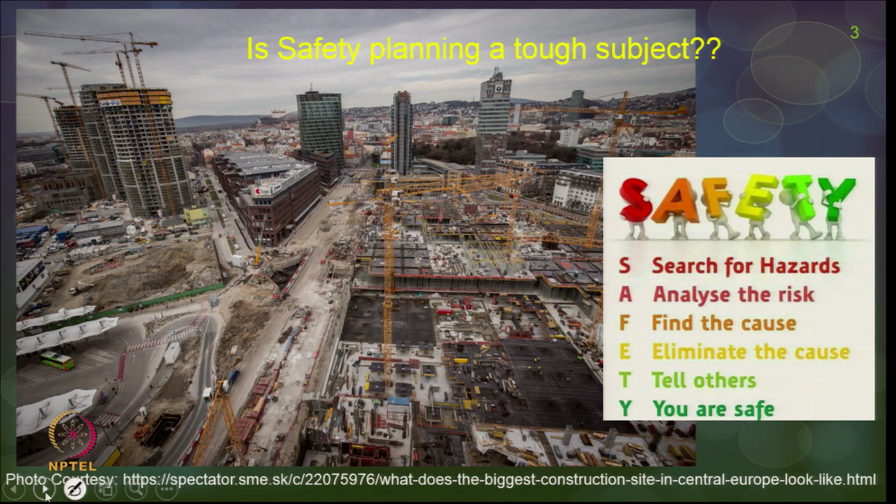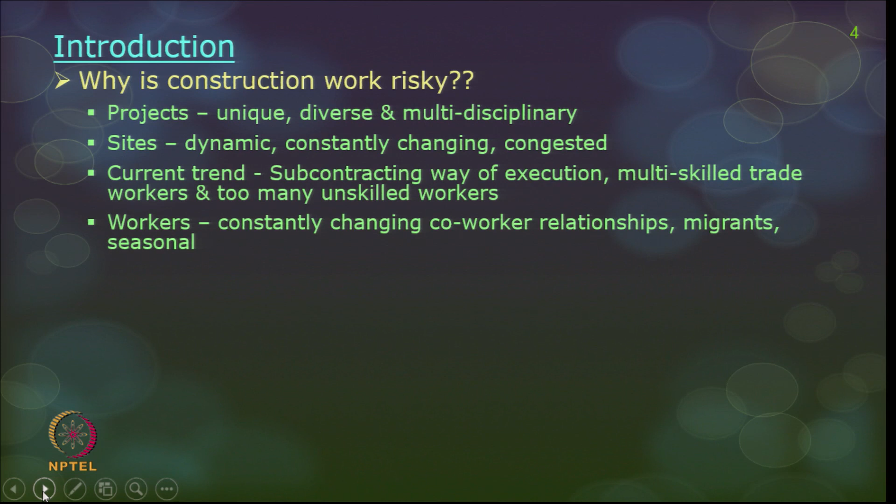Let us talk about why in construction we are not able to achieve a safe environment compared to other sectors. Safety is a major concern in every sector, like aerospace or manufacturing. But why is it so fuzzy in construction, and why is it not achieved even till date? There are so many unique factors as regards construction projects alone, and let us discuss a few of them.

Let us talk about the projects. Most of these projects are unique. For example, if you manufacture a car, the same model may be manufactured repeatedly, so you know what the hazards are, what the sequence is without complicating things too much, and what safety precaution will suit you best, and so on.

In construction, projects are unique, so the learning you get in one project you may not be able to apply in the next 4 or 5 projects. That knowledge and experience you got from one project you may apply only after 5 or 10 projects. That doesn't happen in other sectors.

Construction projects are always very diverse. You have so many engineers, starting from architects, structural engineers, MEP engineers, then consultants, vendors, suppliers. So many people come in and play their role. It is actually meeting different minds, getting work progress done, and at the same time having a safe environment in place, which is quite challenging. As a result, projects are most often multidisciplinary.

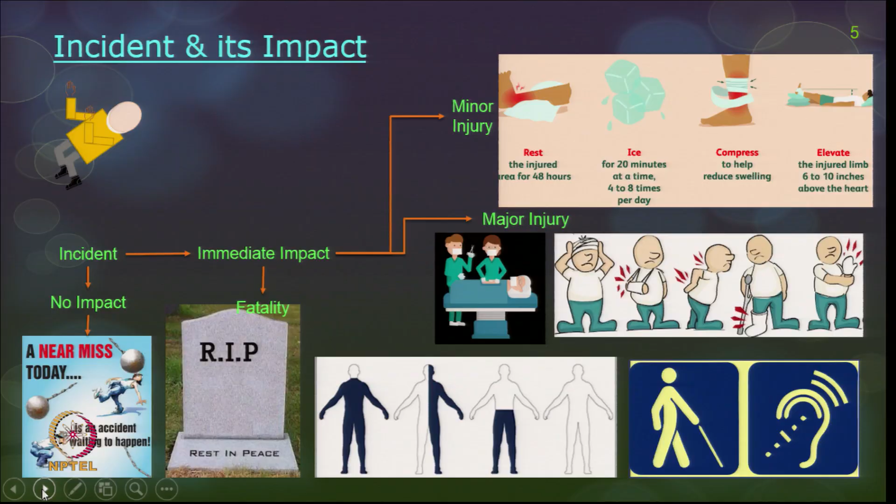The other one is a slow impact. There can be hazards which create a slow impact onto the workers. For example, if you work continuously in concrete or handle cement without wearing proper gloves, after some point of time you may see a lot of cement dermatitis, primarily called cement dermatitis. These will not happen in 1 or 2 days, it happens maybe for several years down the line, 3 to 5 years, or some impact can even happen 10 years later. These are all called health issues.

Now if you look at incident impacts, this is not triggered with just one incident, but I am categorizing everything together. So incident has either no impact, which is called a near miss, or immediate impact, which is a minor injury, major injury, or a fatality. And a slow hazard impact we call health issues.

If you look at the history of safety, which we will discuss a little later, so far people were worried about only the visible impacts, whatever we call minor injury, major injury, and fatality. That was what was really seen by the construction group, and they were treating a lot of safety programs and policies most often focused only on safety issues in construction.

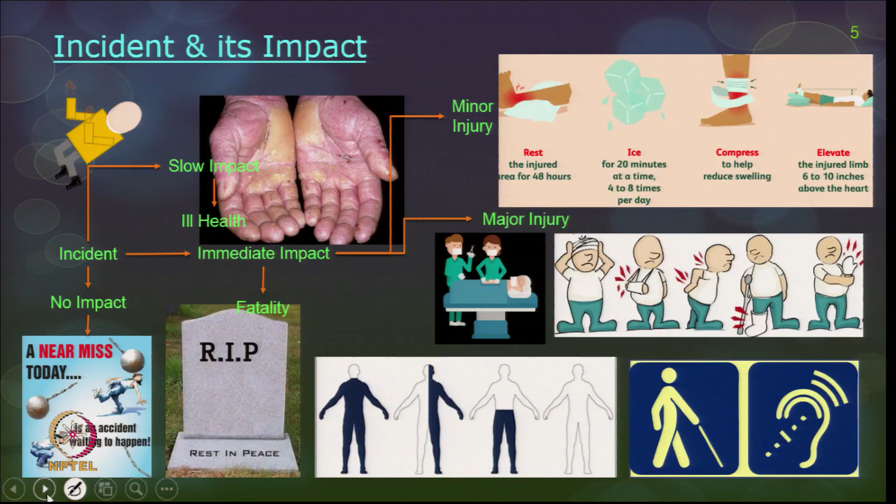Now let us talk about the definitions. What is safety? Safety is always defined as an absence of danger or a state of protection. Then a few of the terminologies which we have seen in the previous slide.

Number one is incident. Any incident is an unplanned, unwanted, unexpected, unfortunate event which disrupts the work process and may cause an injury or damage. Based on the impact, one is near miss - incidents where no property was damaged, no personal injury sustained, but given a slight shift in time or position, damage or injury easily could have occurred and did not happen this round because of the luck factor.

Now there are some things which have come in the definition. If you look at safety, most of the focus on safety is only on personal injury, in the sense only on the worker's injury. But safety as such has to take care of equipment, materials in the site, equipment available in the site, and also the personnel, which implies workers on the site and other human beings on the site. But colloquially most safety norms and policies are primarily towards workers' well-being in the site only.

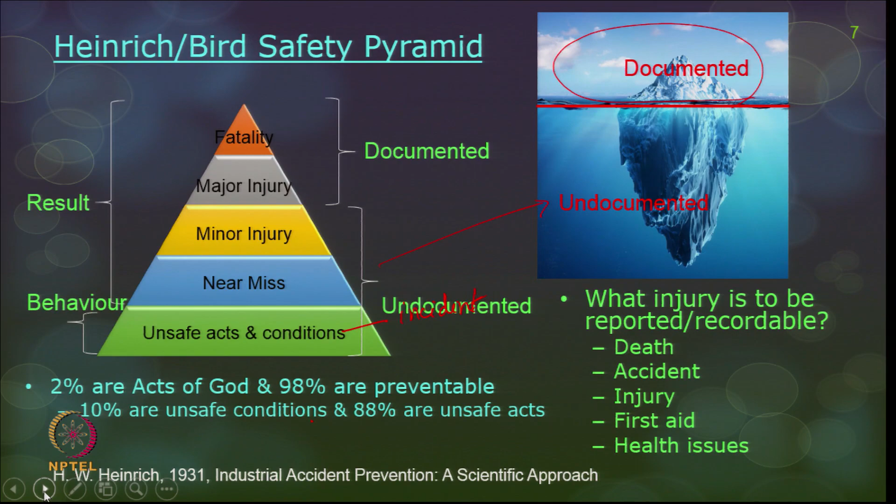Now, what injuries have to be reported or recorded, so it acts as a lesson for future projects, so that from one mistake you have a learning? Any death obviously has to be reported: the reason for death, why it happened, where it happened, what really happened, what the worker didn't do, what precautions the management didn't take. All this has to be reported.

Any accident in the site implying major injury has to be reported for sure. Minor injury, yes, if possible, and if you have a system in place to record all your minor injuries, it also has to be reported. First aid cases, yes, including near misses, also has to be reported if you want complete, zero-accident tracking in a construction site.

Near misses and first aid cases, even though too many happen every day, there should still be a policy of reporting and documenting everything, which should be used as a learning lesson for all workers. Last but not least, health issues also have to be reported these days.

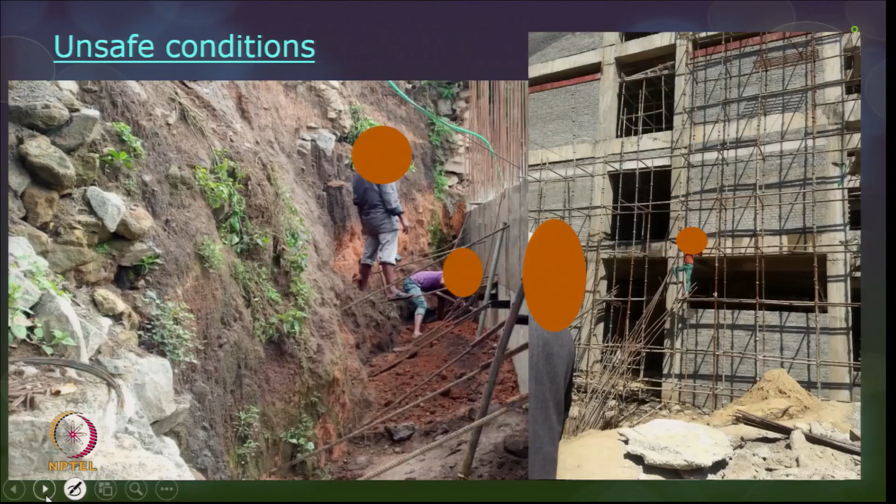Here also, you cannot avoid working on these scaffolds and climbing up to do construction progress work. So this is primarily an unsafe condition, but there could have been a provision for safeguarding the environment. Still, there could have been provision for safeguarding the environment.

So what are unsafe acts and unsafe conditions? An unsafe act is an activity not done according to safety standards. Examples include failure to wear PPE, the number one unsafe act in construction sites; ignoring tool defects, maybe equipment didn't work and you don't report it to management but still try to operate and complete your work; or you don't know how to operate equipment and try to mess with its functioning. All these are examples of unsafe acts.

Violation of health and safety rules: if you have to wear all your PPEs like shoes, hard hats, gloves, you have to work accordingly. Even if you are not comfortable, you should not remove the PPEs and start working in a construction site. The next is unsafe conditions.

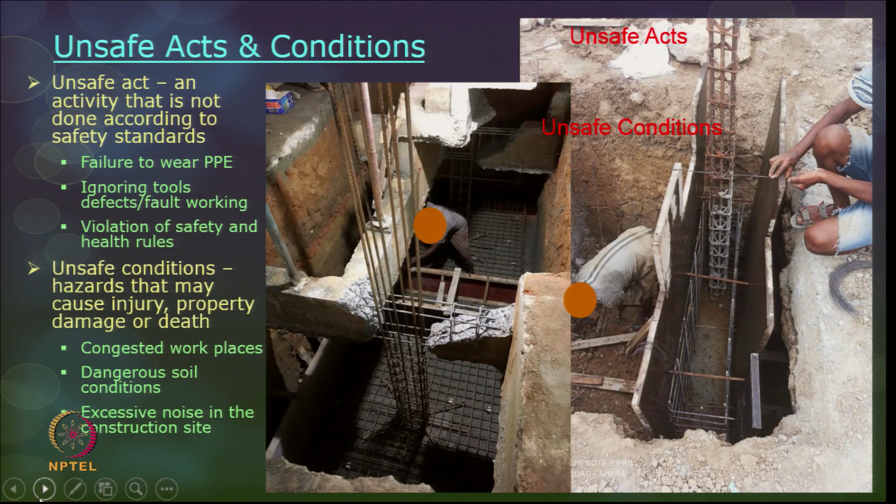Excessive noise in the construction site is also an unsafe condition. You are working in a very big construction site, not operating any equipment yourself, but all around you there are so many equipments producing lots of noise above permissible decibel levels. When you are in the midst of so many equipments, your mind will not be at peace and concentrating on safety. So this is an example of unsafe conditions.

The next term which came along in the introduction was hazard. Many of these terms are used colloquially, but now you learn the different terms and try to put the proper terms when talking about safety. Hazard means an inherent property or ability of something to cause harm. As such, hazard is not dangerous, because there are three types of hazard.

We will discuss this when talking about hazard analysis as a safety program. Every hazard is not active and it will not create any harm. For example, there is an electrical wire passing along a line with equipment also connected to it which was operating, so this is primarily an active hazard.

If by mistake you slip or trip onto the electric wire and fall off, it can create lots of hazards. Let us also complicate the issue, maybe it's lying along a floor wherein curing is happening, so curing actually has water beneath, and then it's a very serious and active hazard. So hazard as such has to be identified in any project, that is the number one issue if you want a completely safe construction site.

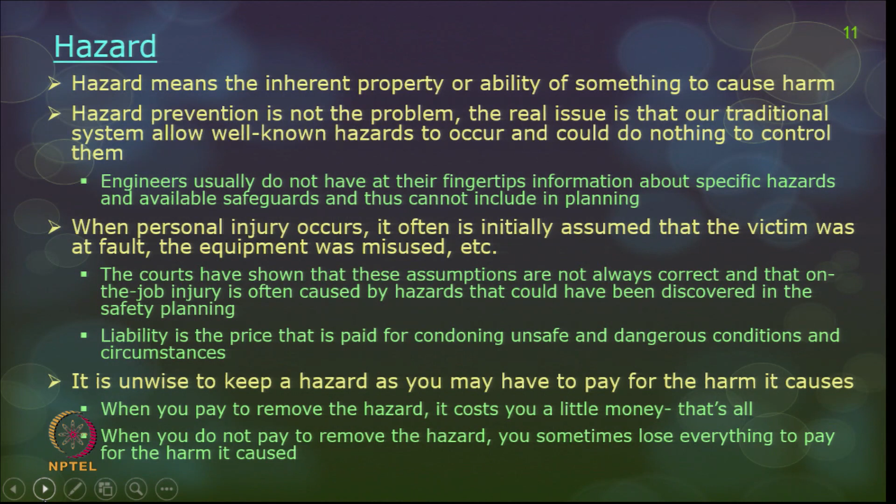That generally does not happen, because once the courtroom proceedings are over, it actually goes into the files and is not open to the public to be kept as lessons learned for other projects. So it is unwise to keep a hazard, as you may have to pay for the harm it causes. When you remove it you have to spend a little money, but if you do not try to remove it thinking you may have to spend money, you may have to pay even more than anticipated. Sometimes you may have to lose everything to pay for the harm it caused. That is the real message behind hazard.

Some researchers have also identified the top hazards in a typical building project, and a few of them are fire, unsafe scaffolds, working platforms, open shafts and edges, unsafe electrical equipment, unsafe excavations, unsafe cantilever loading platforms, struck by foreign body, falling objects, unstable or unsafe structural membranes, overloaded vehicles and forklifts, unstable mobile cranes, unsafe lifting operations, unsafe working at height, unguarded machinery, and unsafe access or egress.

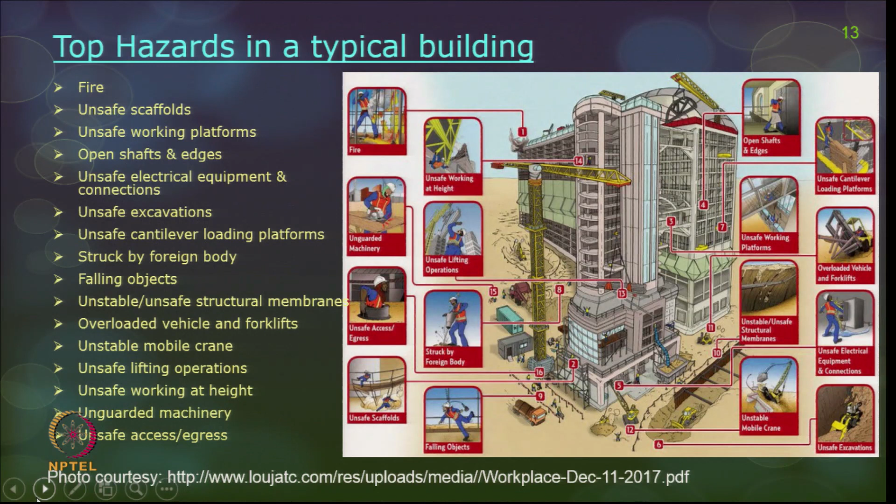So there are a lot of hazards still available in construction sites, and if you closely watch a project and note down all of these, then you can actually think of a lot of corrective measures and preventive measures for accidents.

Now let us move on into the terminology. So far we have discussed a lot of terminology like fatality, major injury, minor injury, incident, near misses, unsafe acts, unsafe conditions, hazard. Now we will again move back to what is this fatality, major injury and minor injury, and how it is in the present scenario in the construction site.

As I told, this pyramid has a lot of numbers associated with it. Heinrich has proposed that for any one major injury there might be almost 29 minor injuries and 300 near misses. In a way it is 1:29:300. A lot of researchers have given different numbers, and these numbers have come from different times and from different groups of construction projects. If you want to know this, the number is quite necessary because you have to think of safety precautions, how many safety programs and investment on safety you do based on some assessment of these numbers in your project. So you may need an understanding of the number.

Accordingly, other ratios are 1:100:10,000, 1:10:600, and there are so many numbers available like this.

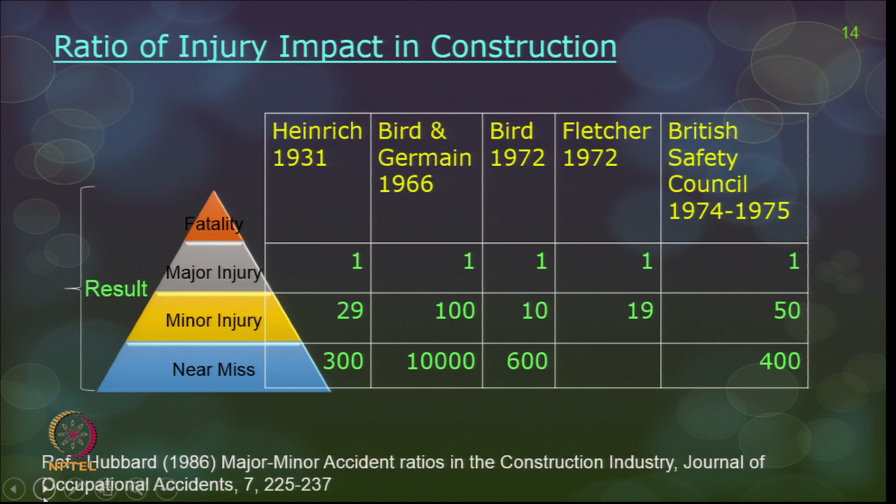Understand that a pyramid always has so many near misses compared to major injury, and so many minor injuries compared to major injuries, and the same way to fatality. So that pyramid is still existing.

Now let us talk about fatality. We will go again from the severe impact to the least impact, so number 1 is fatality. If you look at projects which happened 50-60 years back, in the 1940s, 1930s or 1869 and so on, there are very famous projects which are existing even today, and they are treated as wonders of the world. But if you talk about safety and the number of fatalities that happened, so many projects are really considered the deadliest construction projects. Let us discuss a few of them.

The Great Wall of China had almost 10 lakh deaths during construction - this is only the reported case. So the Great Wall of China had many deaths during construction, and the Burma Siam railway is actually treated as a death railway because so many workers died during its construction - almost 1 lakh people died. The Suez Canal again had 1,20,000 deaths.

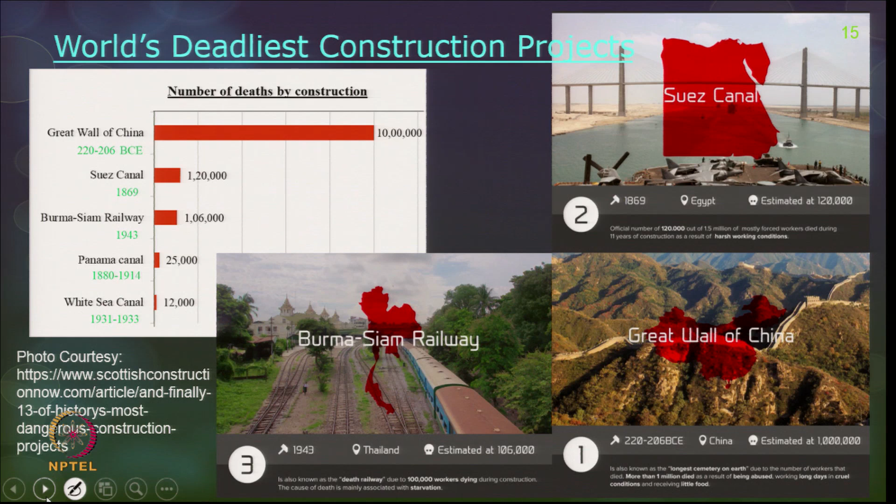So in these earlier projects, so many deaths happened, and from then onward safety became a serious concern. Now if you see, a lot of these fatalities have been really cut down, and today, where are the fatalities in a construction project?

If you look at comparing with other industries - building construction, which is primarily a standard industrial classification, is 25%, heavy construction other than building construction has 19%, and special trades is 56%. This is the statistics given here. So building construction and heavy construction are still having a high number as far as fatality is concerned.

And if you look at comparing with other sectors, for example transport or warehousing, agriculture, manufacturing and mining, construction is still ranking number 3. Construction is even more hazardous than mining and manufacturing - you should note that down. This is a record as of 2018 on fatality, so we still have to improve on fatality rates in construction.

Now if you look at the trend over the last 10 years, there was a steady decline in fatality, and again the rate of fatality has increased. This is primarily a report which has been seen. So 2016 onwards, construction fatalities were 991, in 2017 it was 971, in 2018 it is 1008 and so on. So it's still a 3 digit or 4 digit number oscillating between here and there.

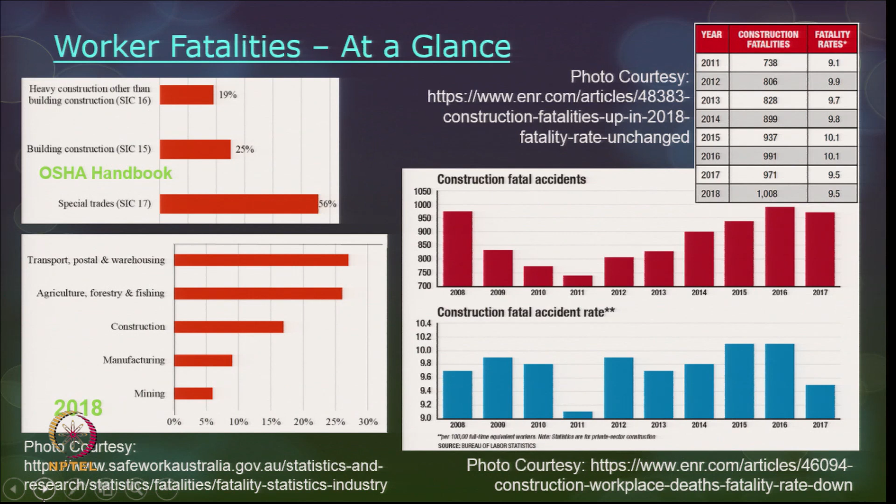There can be many reasons - maybe there were fatalities which were not reported and the reasons were not identified, so they weren't reported. There can be real reasons behind the fluctuations in the death rate, but you should still understand that fatalities are still happening in construction sites, which has to be cut down.

Now, there is one infographic which says according to data from the Bureau of Labor Statistics, for 10.3 million workers employed in the construction industry, 991 construction workers were killed on the job. That's the statistics we saw in the previous slide for 2016. For these 991 fatalities, almost 82,760 non-fatal injuries and illnesses happened - this is actually a combination of major injury and minor injury put together.

What people generally say is that more than fatality, major injuries are a real pain and major problem to construction workers. With fatality, the worker is no more, only his family suffers as a result of the loss of the worker. But when you talk about major injury, a person has to survive the remaining part of his life either without his eyes, legs, or hands, and has to be dependent on someone for the rest of his life in order to go through it. That's why major injury is treated as more serious compared to even fatality.

Instead of death, a construction accident can often cause very serious injuries, and deaths resulting from construction accidents are far better than traumatic injuries or illnesses. What about coma or major brain injury where the person is on bed rest and so on? These are all real serious pain and suffering compared to even fatality. So immediate death has some advantages compared to all these major injuries.

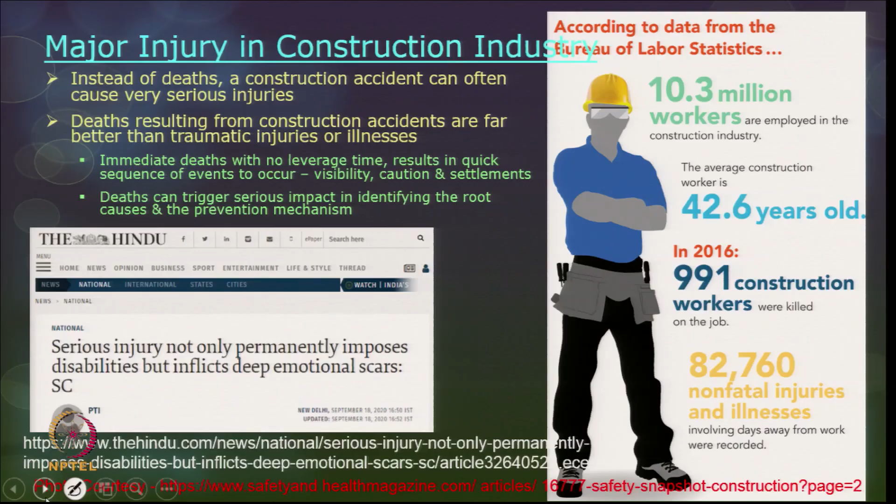And what about the trauma of the accident? The trauma for the worker is something he has to carry with him; it is a very serious pain for the construction worker. This is also a recent article from The Hindu, published in September 2020. Serious injury not only permanently imposes disabilities, maybe loss of an organ, but it also inflicts deep emotional scars. The way the accident happened stays like a trauma in the minds of the workers till he dies. So that is a very serious concern, and you should try to remove accidents in construction sites.

Now, let us talk about how these accidents are classified. So far we know only about major injury, minor injury and fatality, and in many construction sites they talk about death and injury only - two classifications. But all accidents which are not resulting in death are not treated the same; there are a lot of varying levels of impact.

Now, let us talk about the non-fatal injuries and their varying levels of impact. Accordingly, there are two terms which come in: one is absence, the other is incapacity or disability. Absence can be short absence or long absence; incapacity can be partial incapacity or full incapacity. Short absence is less than 5 days away from work and then you come back to work. Long absence is more than 5 days of work - you are actually on leave and then you return back to work with full duties, resuming your full duties.

Partial incapacity - you take leave, maybe short term or long term, but then you may come back to work on reduced duties. In the sense, you may be starting slow into the work and getting fully embedded into the work culture. Full incapacity - maybe you have to switch over your job. For example, you were doing welding earlier, you got an eye injury, you lost your eyes, then you may not be able to do welding after this incident has happened. After you recover and come back, maybe you will not even have any work to do, because you are fully not suitable for any job in the construction site.

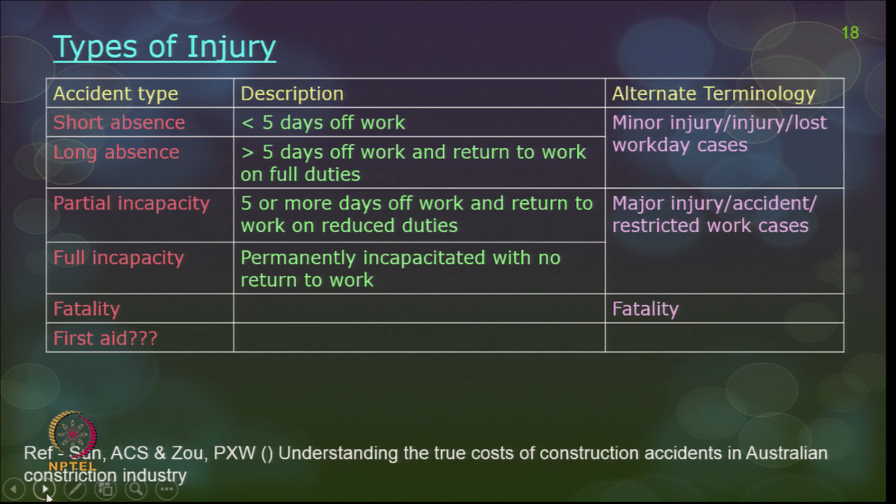Now, let us talk about this disability classification. A lot of researchers have talked about so many terminologies - short absence, long absence, total incapacity or partial incapacity. Now we will be discussing permanent disability and total or partial. So, that is what we are going to talk about: total, partial, permanent and temporary.

Again in reverse order - total permanent disability, wherein the worker after the incident has happened. Now there are two scenarios: one is pre-incident, where the worker was fine and fit; post incident, what is his status? In total permanent disability, he will be totally disabled and permanently disabled. There is no surgery or alternate solution to make him fit enough to do any job in the construction site. So the condition in which an individual cannot work due to injuries - examples can be total paralysis, brain injury, mental incapacity, or amputation of both hands and legs, both hands, or both legs, or both together. Then he is not fit enough to do any job later on - he is jobless after the incident has happened.

The next one is partial permanent disability - partially he is disabled and permanently he is disabled. For example, loss of one eye - with the other eye he can still manage and do some job. So partially he is disabled, and he can do some little risky job in the construction site. He may be employable, but the loss of vision on one side is permanent - a disability that impacts one's day-to-day functioning in the workplace. These injured workers generally go back to work once their treatment is over and they are fully recovered, but they cannot work with full capacity as they were doing before the accident happened. Examples can be hearing loss, blindness, or post-traumatic stress disorder, and so on.

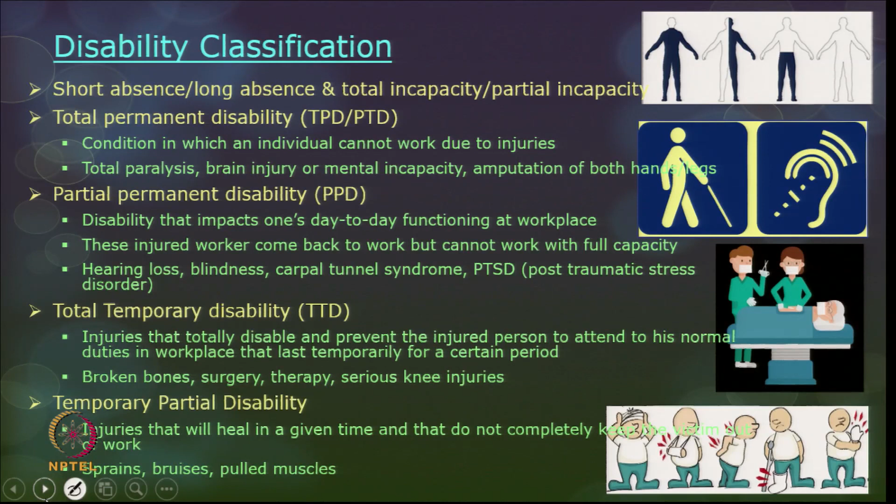But all these are absence, okay. Some sort of productivity loss you show in the construction site. So any safety accident that happens in the construction site, the immediate impact you see is absence, maybe a short absence or a long absence, and immediately productivity loss happens in the construction site, that you have to keep in mind. Now we will talk about minor injury.

In the previous slide we talked about full capacity, disability and so on. Now, what are these minor injuries? Examples are all given here. Laceration, for example, a worker has fallen down from the nth floor onto the ground floor, maybe onto reinforcement and so on, and the reinforcement rod has pierced him in several places. So it is not a regular cut with sutures, but irregular cuts and sutures. It is primarily called laceration.

Punctures - in the previous slide on hazards I showed you that a nail on lumber can be a real example for a puncture or a cut. Fracture, I think it is a very common term. Strains, crushes, sprains, dislocations because of wrong lifting or too heavy loads and so on. Scratches or abrasions which happen when you are handling reinforcement steel or something that doesn't have a smooth surface. If you handle it with a bare hand, you may get a lot of scratches and abrasions. Contusions, bruises, or internal bleeding which happen as a result of some accident in the construction site.

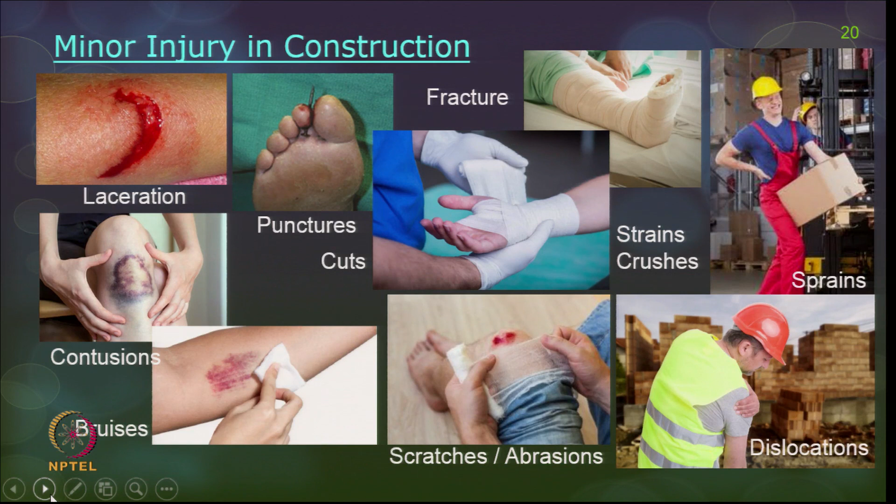So these are all classified as minor injury in construction. If you look at the infographics on minor injury, construction accounts for 31% of fatal injuries, and among all these fatal injuries at least 31,000 cases are related to these ill health issues and so on. If you look at non-fatal injuries, it can be injury or illness.

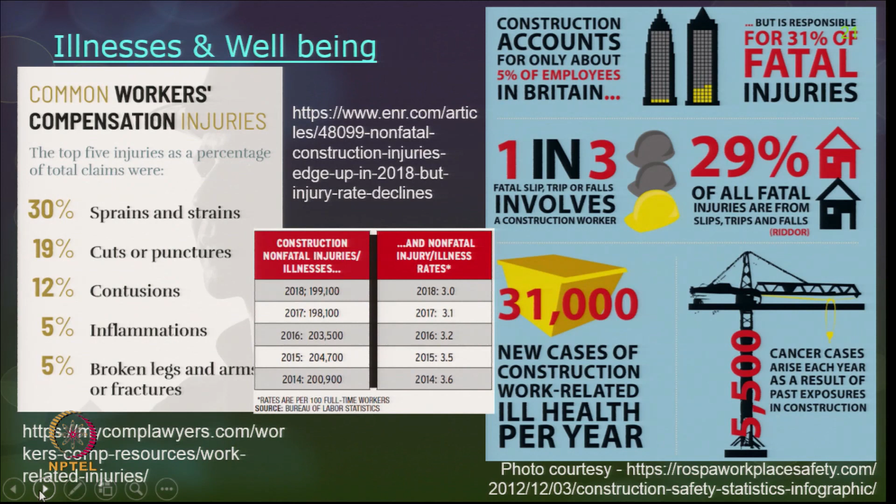If you see here the trend from 2014 to 2018, it is primarily in terms of lakhs. About 2 lakh something in 2014, and right now in 2018 it is 1 lakh 99 thousand something. This many injuries and illnesses have been reported. If you look at compensation for workers in terms of minor injury, 30% have been spent on sprains and strains, 19% on cuts or punctures, 12% on contusions, 5% on inflammations, and 5% on fractures. So that is where most of the compensation was paid to workers for minor injury.

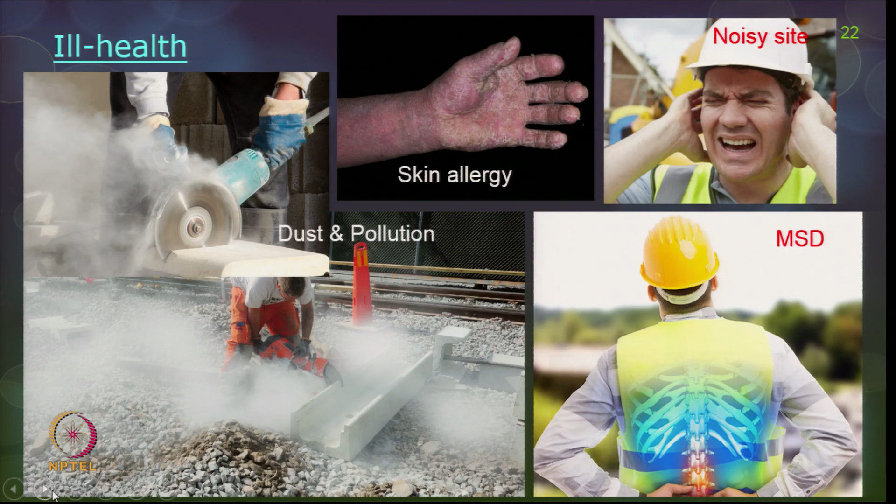Now let us talk about ill health. Ill health examples - the main example is dust and pollution. In any construction site you cannot avoid the dust, and the pollution as a result of the dust. The other one is allergic reactions, primarily because of cement. Every construction these days is dependent on concrete, so skin allergy or dermatitis is the number one health hazard you may see.

The other one is noisy sites, because of a lot of equipment, heavy equipment handled in the construction site. Noise levels cannot be compromised in a construction site.

Over some point of time, hearing impact or hearing loss can generally happen if you do not take proper precautions. The other one is musculoskeletal disorders as a result of wrong lifting of loads. Maybe you have to call a co-worker and get his help in lifting loads if the loads are too heavy. Instead of that, if you start doing wrong liftings, then you may have all these musculoskeletal disorders.

So what are these adverse health effects? These adverse health effects are so many. We will talk about health issues in detail after a few classes. So any change in body function or the structure of cells that can lead to disease or a health problem.

This can include a disease or change in the way the body functions, grows or develops, effects on children, grandchildren and so on. Some problems can be transferred, it's all heredity. Decrease in lifespan, change in mental condition as a result of too much stress or traumatic experiences, and effects on the ability to accommodate additional stress. These are all examples or issues with regard to health issues.

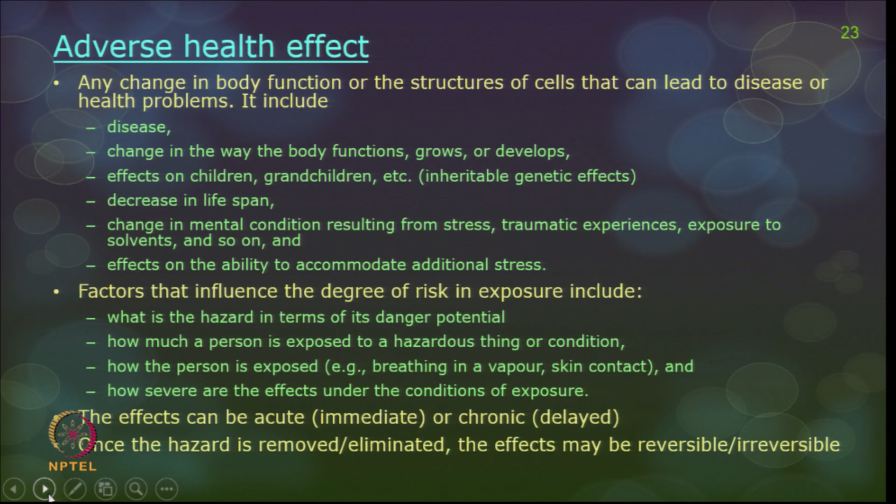Now the other issue to keep in mind is, once the hazard is removed, eliminated, or safeguarded, the effects can sometimes be reversible, and some effects are not reversible. For example, if you start taking treatments and avoid cement exposure or dust exposure, slowly you can be completely recovered. But with solvents or explosives or something that has been on the workers, some of the effects are not reversible - they are irreversible.

Now, what about the growth of the construction industry? So far we have talked about all the terminologies with regard to accidents, starting from fatality, major injury, minor injury, and near misses, and also ill health.

Now, every time this issue comes in - construction projects today are not like how they were earlier. So what was the growth of the construction industry? Let us not talk from too far in the past, let us talk maybe from 40-50 years down the line. From 1960 to present, what has happened? From low rise building structures to a lot of skyscrapers and infrastructure projects these days, like metro or even airports and so on.

If you see the trend, several of these famous, iconic, challenging or mind-blowing structures in the world, if you recall, were built only after the 1980s, with few exceptions that were built before 1980s. Otherwise, most of these structures were all built only in the recent past.

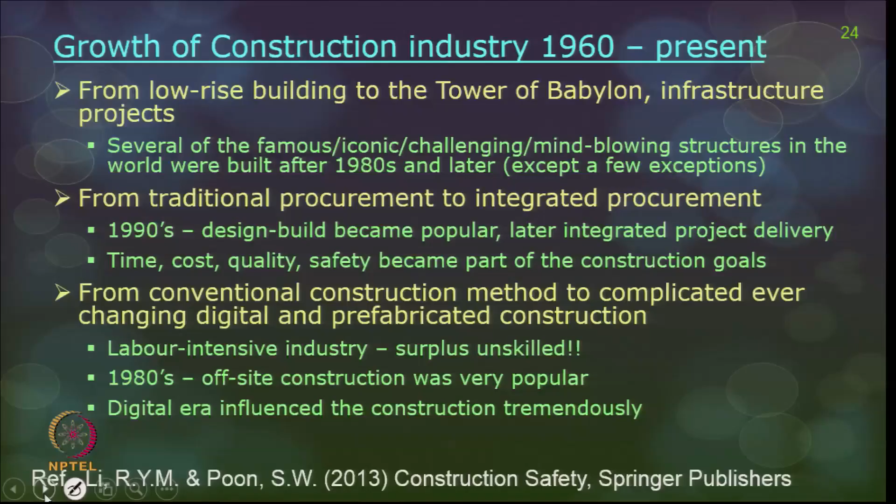The digital era also influenced construction tremendously these days - BIM and other technologies came in. As a result, we are able to move into robotics, 3D printing, and use drones for safety precautions. Lot of laser scanning and other technologies have all been there to help construction growth. So projects are always having a lot of change in trend these days.

Now let us start looking at what are the causes of construction accidents as a result of the growth in the construction industry in the last 50-60 years. Number one, we categorize it as human issues - human error, misjudgments, unsafe acts, and relationship with colleagues. Because of subcontracting relationships, you may have a poor relationship with colleagues, which may be a real reason for accidents.

If you have friends available who move as a gang from one crew to another, obviously your friends will tell you of the potential dangers in the construction workplace. For immigrants, there may be a poster in the local language, maybe Hindi, and the immigrant person may not be able to read that language and understand what is written there. So diverse culture and language is also a cause for accidents.

Insufficient safety training and education - most of these issues are common sense. You should always know you should have proper PPE when working on a construction site. Most of it is common sense, but that does not mean common sense is equivalent to safety education. There should be proper training and education on safety, and workers should be reinforced on safety every now and then, maybe in toolbox meetings or safety training.

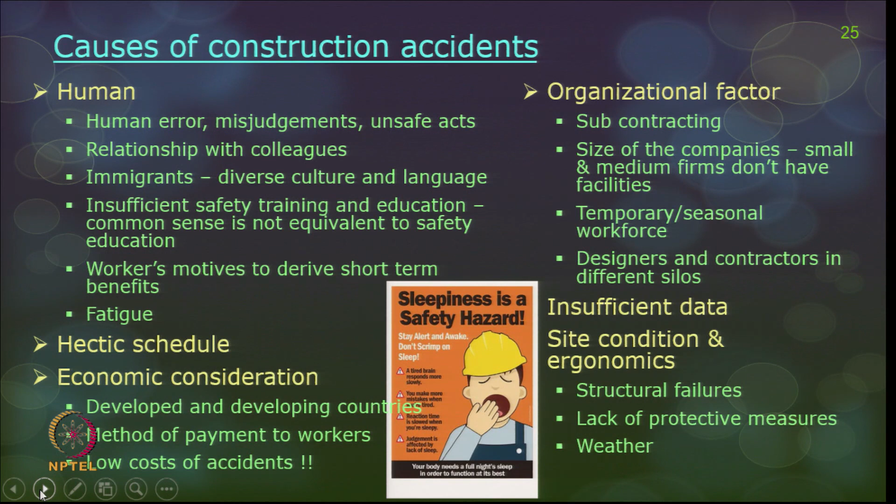That is obviously true for site conditions and ergonomics too - structural failures, lack of protective measures, and weather are other issues. When you have bad weather, for example heavy rainfall, heavy snowfall, or very hot summer, you should not expect too much productivity from workers at the construction site.

Now, why prevent accidents? There are many reasons. Humanitarian reasons - the ones not documented anywhere - this is primarily human suffering, it can be physical pain or hardship resulting from death or disability. Without the earning worker, the family has to suffer the loss and continue with their lifestyle. Then there is physical pain from major injuries - all this has no way to be documented, and these things should not happen. So accidents have to be prevented.

Moral reasons - till date construction is always treated as very dangerous, so this awareness has to be taken care of. The worker morale can always be strengthened with safety programs in the construction site, but still the workers have to feel that sites are always safe. That is another reason.

Legal reasons - civil law also enables injured workers to gain compensation, citing that a reasonable standard of care and protection was not provided. So it is primarily an employer's duty of care to give a proper safe site and safe place to the workers.

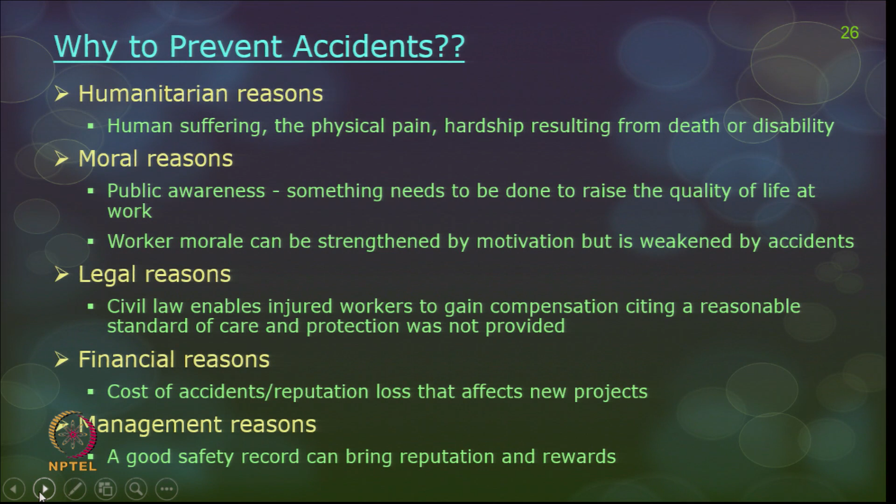Management reasons - a good safety record can bring a lot of reputation and rewards to the workers.

So when do these injuries occur? Let us talk about when and how these injuries occur. Although there is no specific pattern on how these injuries occur, statistics show that there is a pattern available in a construction site, and if you closely watch, the pattern is linked with some logic and gut feel sense. So there are no hard and fast rules that tell when most injuries occur in a particular project.

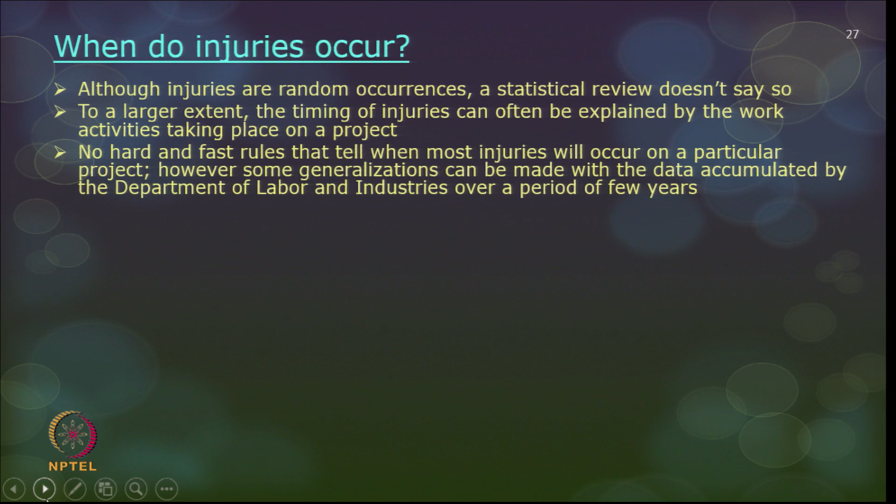However, some generalizations can be made with the data accumulated by the Department of Labor and Industries. Over a period of years, some statistics were gathered, and this can change from project to project - this is not a recent report, it happened several years back. So you may have to think about it and try to formulate statistics to create a new record on how injuries are happening in your construction project site.

Hour of the day - in a normal construction site, a regular project, the project starts at 8 o'clock in the morning and workers start reporting to the site. As soon as they start reporting, they go to the site supervisor to get to know what their work is for the day, and then they start collecting their equipment, tools and so on. By the time they reach their construction workplace, it is close to 8:30, or sometimes even 9 o'clock.

If there is a small briefing or safety precaution or some gathering to happen, and then they move to the site, work generally starts by 9 o'clock. As soon as the construction worker starts their work, the productivity of the worker is never at the maximum - it takes some time for the worker to get into the work, his mindset into the workplace.

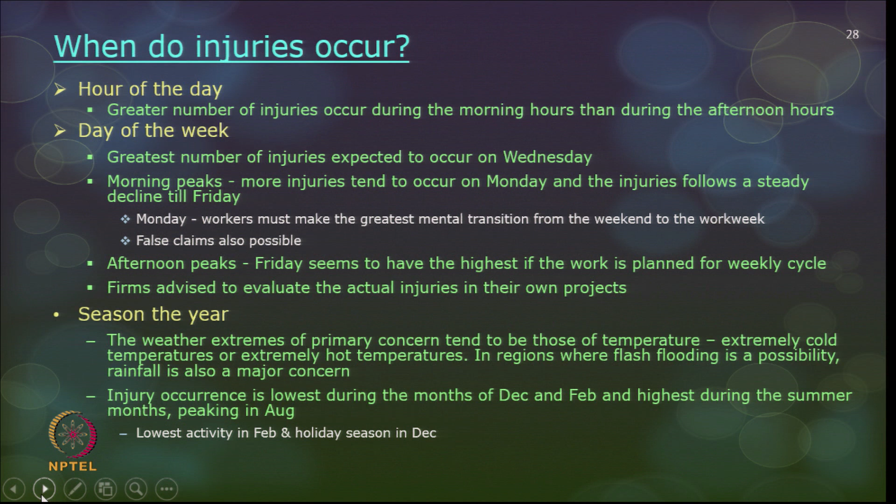Season of the year - again, extreme weather should be a real caution. When we talk about health hazards, we will talk about cold stress, heat stress and so on. Extreme cold and extreme hot temperatures are generally a serious concern, and you should give adequate breaks to workers and not impose a hectic schedule. Also, where rainfall is a possibility in some regions, it should be taken into consideration when construction works are happening.

So to recap, types of accidents in construction sites: so far we have talked about total disablement, partial disablement, vehicle related injuries, unsafe acts related injuries - all related to workers' misbehavior on the construction site - unsafe conditions related, location of injury, whether external organs or internal organs are injured, and so on. Reasons for injury, we will see a little later.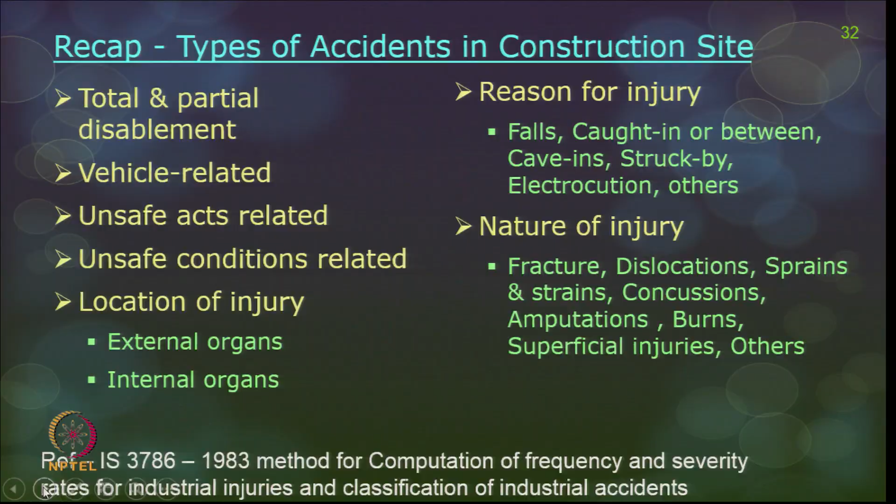From week 3 onwards, all the lectures will be arranged along these falls - caught in or between, cave in, struck by, electrocution and so on - and the operation wherein each hazard is seen to the maximum will also be covered alongside these hazards. We will see this from week 3 onwards. Nature of injury, again - fracture, dislocation, sprains, strains and so on.